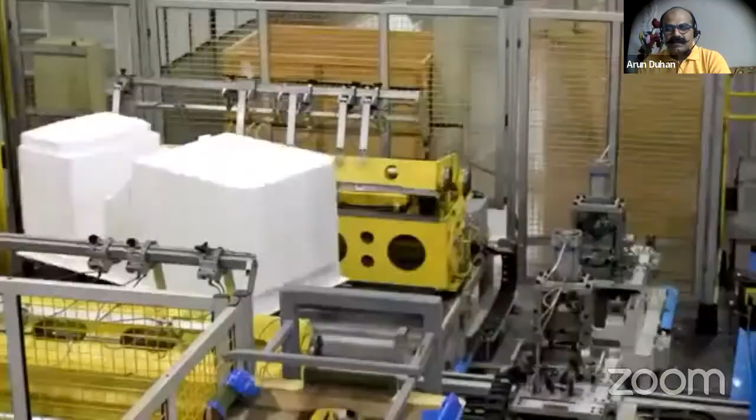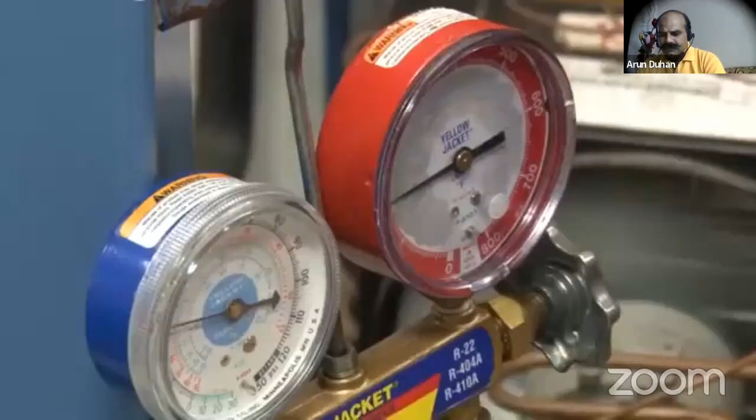ISHRAE disseminates knowledge through its technical committees, which consists of some of the best minds of our industry. It publishes technical books, newsletters, and a prestigious journal, distributing the wealth of knowledge to all its members. Working with government departments, ISHRAE helps formalize industry codes and standards. ISHRAE promotes research by offering financial support to student members to carry out groundbreaking work in technology, systems and processes.

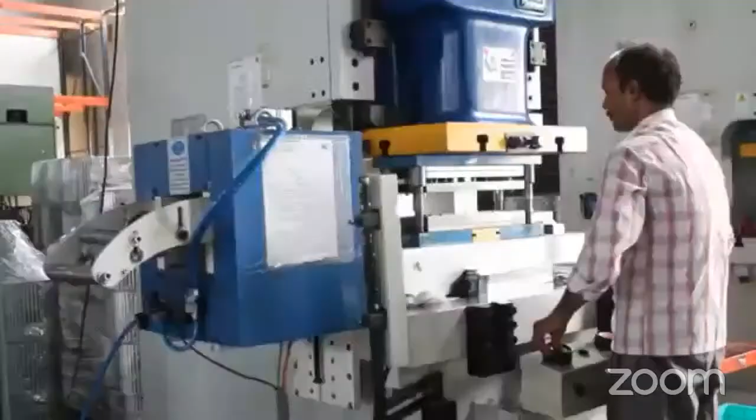Our educational wing, ISHRAE Institute of Excellence, organizes training programs and workshops to help members enhance their skill sets. Our specially designed certification programs under ICP, that is, ISHRAE Certified Professional, empower professionals to always be in step with the prevailing technology. Specially designed courses for technicians are offered to meet the ever-increasing demand for a skilled workforce.

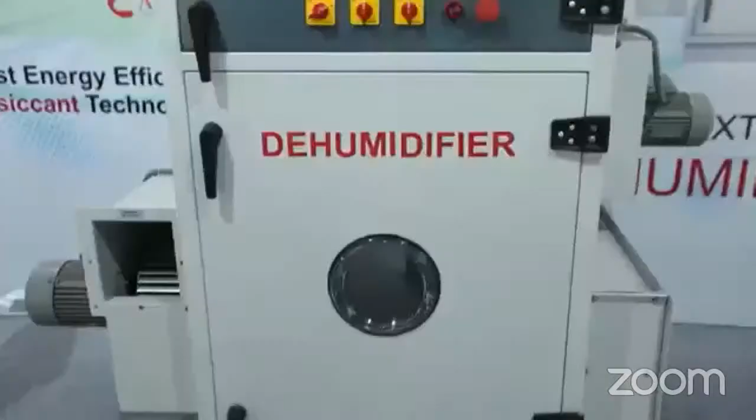ISHRAE organizes exhibitions, conferences, panel discussions, and product presentations throughout the country. We organize the industry's largest international exposition in South Asia, Acrex India, to showcase the cutting-edge technology, innovation, and provide a platform for closer interactions amongst the decision makers in the industry.

We are committed to provide training and career guidance to our student members through seminars, lectures, quiz contests and site visits. A-Quest, a prestigious quiz competition organized by ISHRAE to catalyze the transformation of the budding engineering professionals.

ISHRAE provides a platform to potential employers to select student members for careers in HVAC and our industry at the ISHRAE Job Junction. Young minds are made aware of the need for saving power, clean air, and sustainability. The K-12 initiative of ISHRAE focuses attention on school students' development to inculcate a scientific fervor and help develop them into responsible citizens.

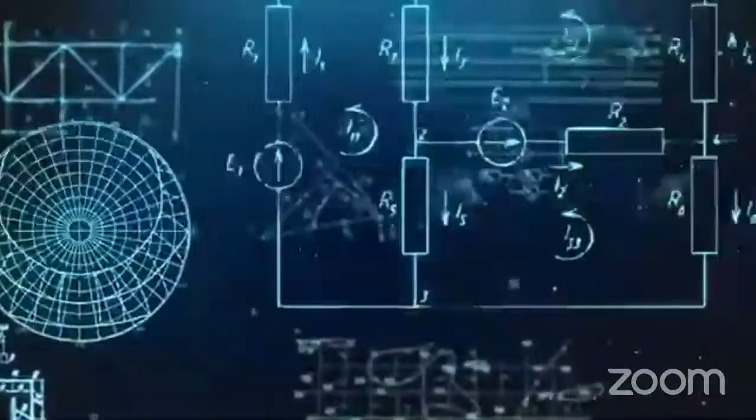Speedy information is imperative to keep moving forward in this hyper-connected digital age. Searcher, a specifically designed search engine, is now available, which allows access to a well-catalogued database on HVACR and building services industry with just a few clicks.

ISHRAE cooperates with various national and international bodies, industry, governments, academia, think tanks to promote the concept of sustainability, environmental protection, and energy efficiency and conservation.

To enter and explore the universe of the Indian HVACR industry, log on to ishrae.in that unfolds a panorama of information. Let us engineer a sustainable future together through ISHRAE.

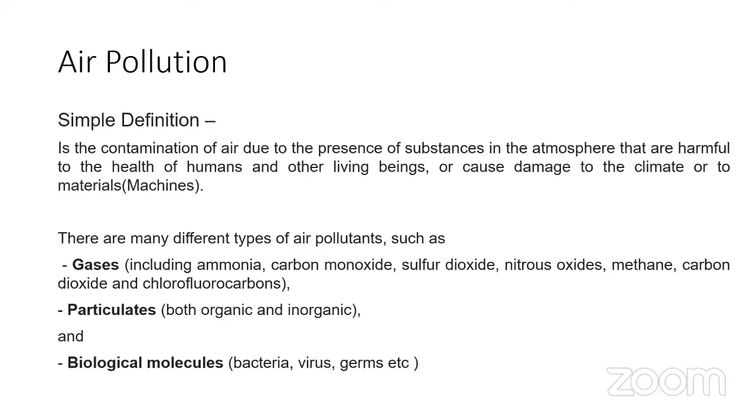So as air pollution goes, air filtration goes hand in hand now. Various air filtration techniques have been adopted to optimize air quality, and these techniques can remove air pollutants and effectively improve the deterioration of air quality that we all know. This presentation is a comprehensive review on the synergistic effect of different air purification technologies - meaning combining various air purification technologies together using air filtration theories and materials standards. We'll evaluate different air filtration technologies considering factors like their energy and economics, working principle, impact, performance and efficiencies. So that's all in a nutshell.

We will have a quick look in the following slides.

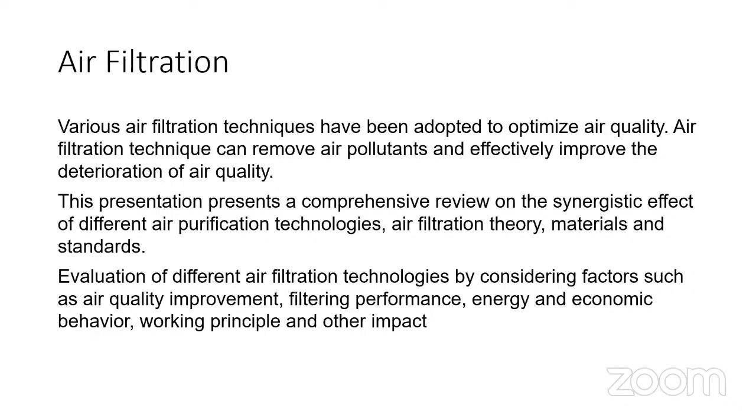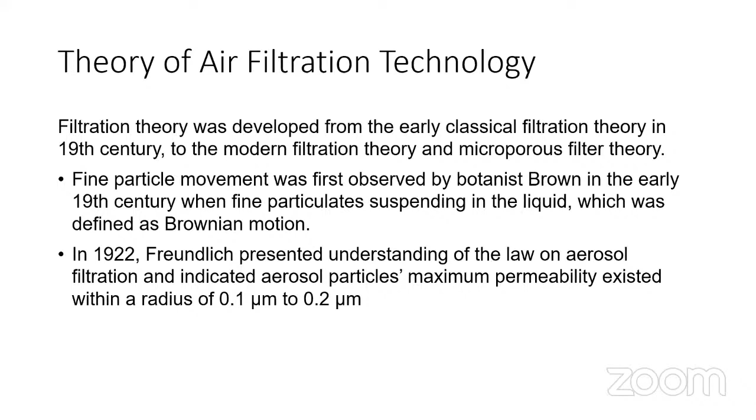Before we start getting into the filtration technologies, we must know where it all started and who developed these theories. Early classical filtration theory in the 19th century led to modern microporous filtration theory. Fine particulate movement was first observed by Brown in the early 19th century, when fine particulates suspended in liquid were observed, which was defined as Brownian motion. In 1922, Freundlich presented the law on aerosol filtration, indicating that aerosol particle maximum permeability exists within the radius of 0.1 to 0.2 micron. These were great findings by the researchers.

I have combined a list of researchers who have helped us in the past find the size, characteristics, and properties of various particles in the air, their various laws and filtration theories, and the practicals done to achieve separation of particles from the air. This is the chronological order of the key achievements by the great researchers in the past. This slide will be shared after the presentation to all attendees, so you can have it handy and read about the researchers more yourself.

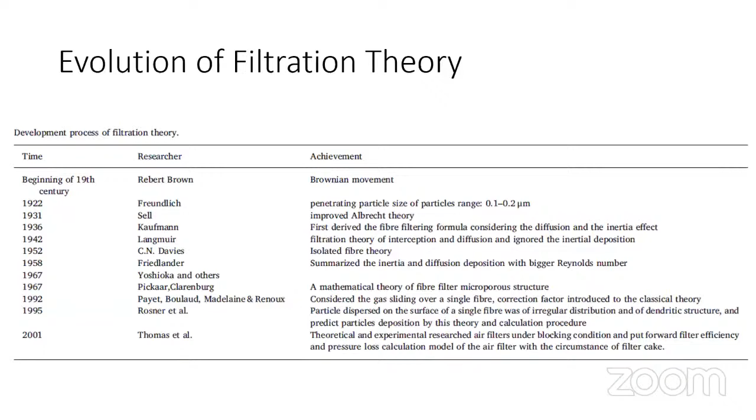So let's understand particulate matter. Most media, communication, news articles, and theories talk about particulate matter, and this is a key component when we talk about air filtration. We must know what particulate matter is. There are three matters: solid, liquid, gas. There is a fourth, plasma, but plasma doesn't pollute so far. These three elements are the usual suspended particulate matter we know as aerosol in the atmosphere. All these solid, liquid, or gas matters could have different shapes, sizes, characteristics, properties, and different reactions to resistance levels against force, electricity, or any other external action.

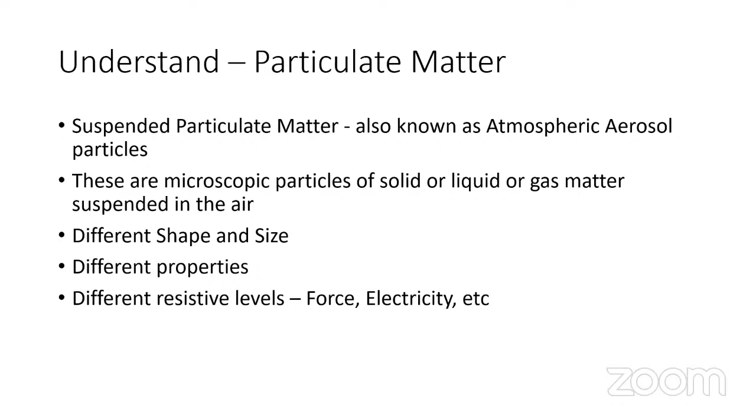The filtration systems designed in the past, or now being designed for the future, are evaluated based on various factors of the behavior of the particulate matter. So we must understand and measure the properties and characteristics of all three matters before putting up the filtration system, and that's what we will see and learn in the following slides.

If we take solid matter in hand, usually it's called dust, and everyone knows dust usually contains silica, sand, salts, minerals, mica, glass, wood. There are several things, fine particles or coarse particles, counted as dust combined. These are also characterized based on their properties into simple dust and difficult dust. Difficult dust is the kind that is not normal in nature, it could have very small particle size, very low density, or very low or high mass. It could be fibrous or non-fibrous, sticky or abrasive, reactive in terms of explosive particles, or hot or cold particles. So there are different characteristics and properties which define different behavior for dust particles.

These are key points which must be considered before selecting the filtration system, because either the filtration system will not be efficient enough to deal with the particle in the air, or it can create a byproduct or harm otherwise. So a detailed analysis of solid matters must be done before finding the right filtration solution.

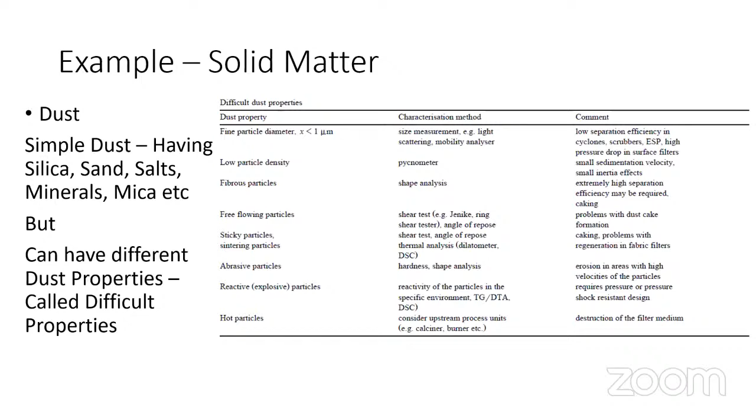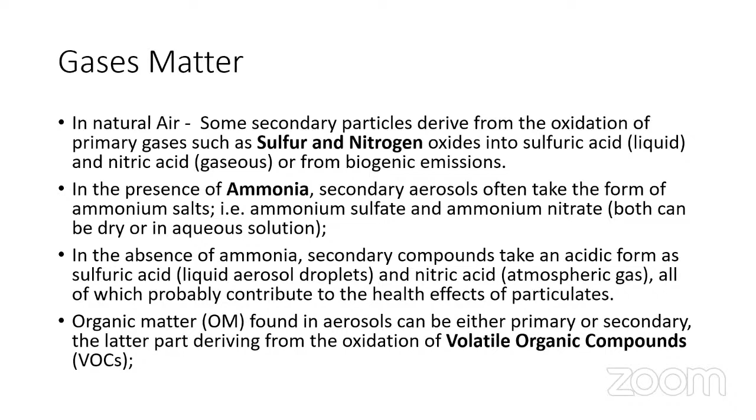When we talk about gaseous matter, in natural air, some secondary particles are derived from the oxidation of primary gases like sulfur and nitrogen oxide into sulfuric acid and nitric acid, and it could be in liquid and gaseous form both. In the presence of ammonia, the secondary aerosol often takes the form of ammonium salts, ammonium sulfate, and ammonium nitrate, and it can be dry or liquid. But in the absence of ammonia, the secondary compounds could be acidic, nitric, or sulfuric acids, again as liquid droplets as aerosol. This is important to understand, that gaseous matters can also produce liquid matters based on their reactions and oxidation properties. Organic matters like VOCs, volatile organic compounds, are also aerosols present as gaseous matter.

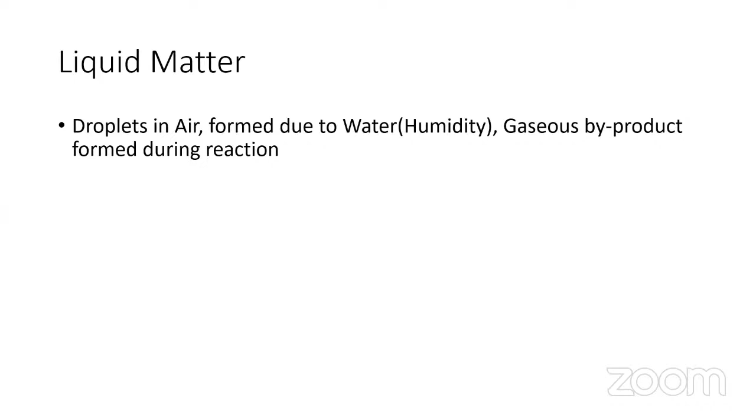So now let's have a quick review of the working principles identified by great researchers in the past, based on the various filtration techniques. Inertia, impaction, diffusion, interception, gravitation, absorption, agglomeration, electrostatic ionization and polarization, catalysis, radiation, combustion. These are the back-end working principles behind the various air filtration techniques that have been adopted in the past.

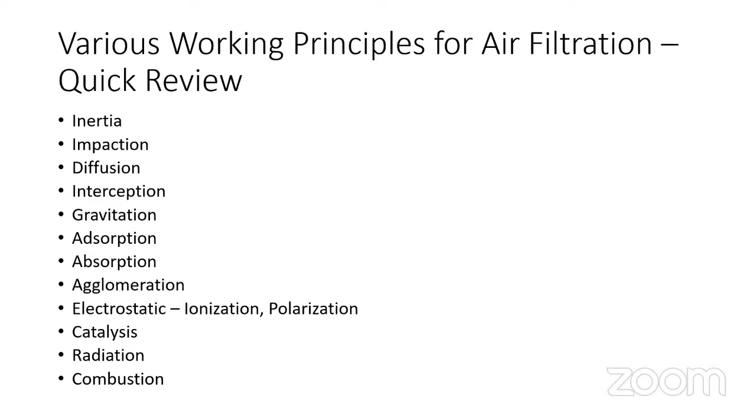I'm sure most engineers know what inertia and impaction are, so I'm not getting into the detail of that. But if somebody wants to know more about it, they can always drop an email or reach out to me. I can probably help explain, or we can have another session if required, based on your input about all these working principles.

Based on the working principles, this chart or table is drafted, which at a high level says what their effectiveness levels are on what kind of pollutants. The purification techniques are listed here, and we have bifurcated the pollutants into suspended particles as solids, gases, and microbiological, with their size difference. Mechanical filtration systems, usually fabric-based, work very well and are very effective for suspended particles like dust, pollen, lampblack, etc. But they are not effective on gaseous contaminants. For microbiological contaminants they could be effective or non-effective based on their size and diameters.

Adsorption-based systems, like grid blocks, granular media or activated carbon, are partially effective for suspended particles based on their pore size, but very effective for gaseous contamination arrestance. They are equally effective and non-effective based on the pore size, which can arrest the bacteria and the virus. Water washing as a purification system is effective for suspended particles, mainly solids, partially for gases, and not effective in removing bacteria and viruses. They will get dissolved into the water and nothing will happen to them.

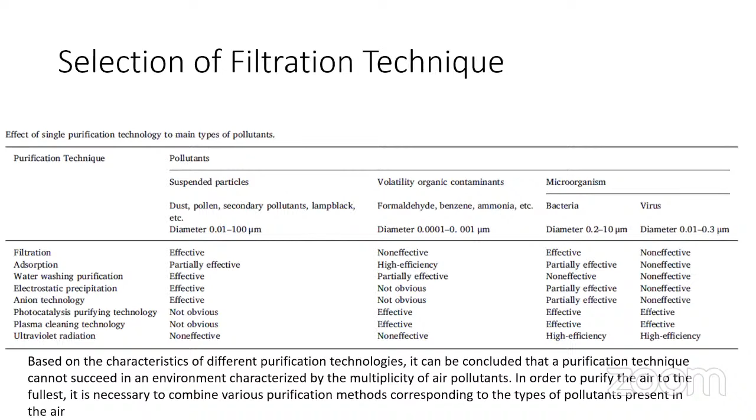If you see the pros and cons chart, again based on the technologies, they are relatively good on some aspects and not good on others. Take the fiber filtration system: as we've seen in the last slide, very good for particles and microorganisms. Their advantages are low cost and very easy installation and implementation. But their efficiency depends on the pressure drop, the resistance of air. They're usually highly resistive to air flow.

Electrostatic dust removal is very good for particles and microorganisms, but again, high investment is needed because these are costly machines, which also require regular electrostatic fields. If the electric field is not working, then there's a puncture in your filtration system. So that's a disadvantage. Also, frequent maintenance and cleaning is required because the efficiency curve declines with dust loading on the electrostatic plates.

We will talk in detail about how the electrostatics work and how the fabric fibers work in the following slides. Ultraviolet sterilization systems work very well for microorganisms, but as the flow rate and velocity of the air increase, the efficiency decreases. So it has to be rightly calculated, and if it is overdone, it can create byproducts as well.

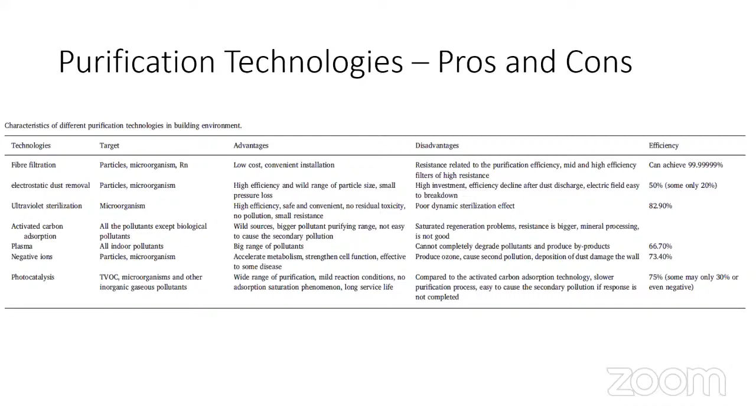Please. Okay. As I was explaining, photocatalytic treatments also bring pros and cons, and the cons are the reactions are slow, they don't work for particulate matter, and they create secondary pollution if the reactions are not completed. So these are the high-level advantages and disadvantages. The disadvantages could be listed by various factors, like economics, installation, size and dimensions, and energy efficiency. There could be n number of factors.

This is a slide I have tried to put together to explain how the synergetic effect works. We were talking about various pollutants and various techniques and their pros and cons, but as we said, one particular filtration technique cannot work for all kinds of pollutants. So how does the synergetic effect work? I have taken some examples of brands that use multiple technologies for air purification.

Take the example of Blueair here, which uses a fabric-based filtration system. They also have adsorption and electrostatic precipitation. All combined together, they are trying to cover the maximum band of air pollutants across the size segments. Sharp has created the Plasmacluster ion. Daikin has most of the technologies combined together. So this is a representation of integrating various technologies together to get the fullest outcome of maximum purification efficiency.

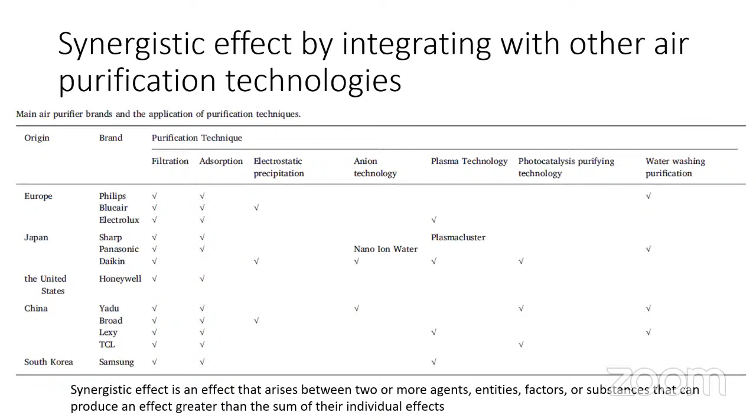So now let's study the filters. I have distributed them into three segments: mechanical, chemical, and biological, based on the working principles. I have also tried to list which works best for what kind of matter. The first section is mechanical. Settling chambers work very well for solid matter, then cyclones, electrostatic precipitators, spray towers, venturi scrubbers, bag houses, fabric filters, which work very well for solids, and deep bed scrubbers.

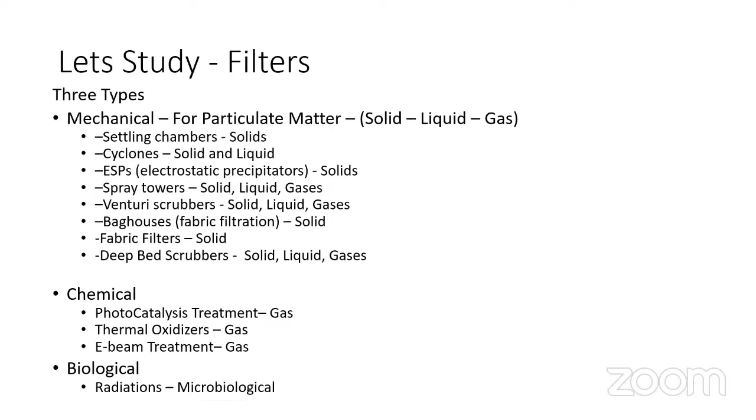These are the popularly known techniques or filtration systems, widely used in various sectors like industrial, commercial, and domestic for a long time, and very proven from an efficiency perspective. But as I said, something works for some kinds of pollutants, and another thing works for other kinds. So we will get into all the details one by one. Let's see how the settling chamber works.

The settling chamber is the simplest designed system, wherein there is a chamber called the settling chamber, and an air stream goes in and out. From the design, the airflow coming in at the inlet slows down in this chamber, and because of that, with gravitational force as the working principle, the bigger particulate matter drops into the hoppers. Once the hoppers are filled, we take out the dust particles, and the air going in and out gets cleaned.

So it's the simplest way of cleaning air that has bigger particles. It doesn't work for fine particles. It is widely used in industrial emission controls, for dust, fibers, metal chips, etc. These are reusable systems, which is a great advantage, because once deployed you can use it for n number of years with regular cleaning and maintenance. The biggest disadvantage is that these are usually very big in size, and that's the reason they are widely used in industrial emission controls.

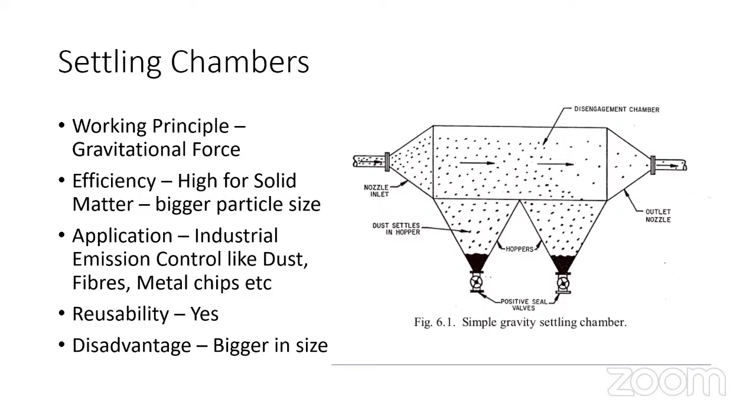The second type of most popular system, specifically in the industrial sector, is the cyclones. Again, it's a very simple designed system, wherein there's one inlet for the airstream and there's an outlet of the airstream, but it's at a very high velocity, so that once it reaches this vessel, which is cylindrical and conical in shape, a cyclone is produced. And with the working principle of inertia, gravitational forces, and agglomeration all together, the particles drop into the hopper, and the air stream which is revolved in this vessel gets clean.

It is again very good and highly efficient for bigger particles. It even works for smaller particles because of the agglomeration. Widely used for industrial applications, again for dust, fibers, metal fibers, woods, etc. This is again a reusable system, because once deployed, just cleaning is required and it works well for many years. The disadvantage of the system is that it is difficult to remove wet or sticky particles. It has to be dry. So usually before the cyclones, air dryers are also installed to get the maximum efficiency out of it.

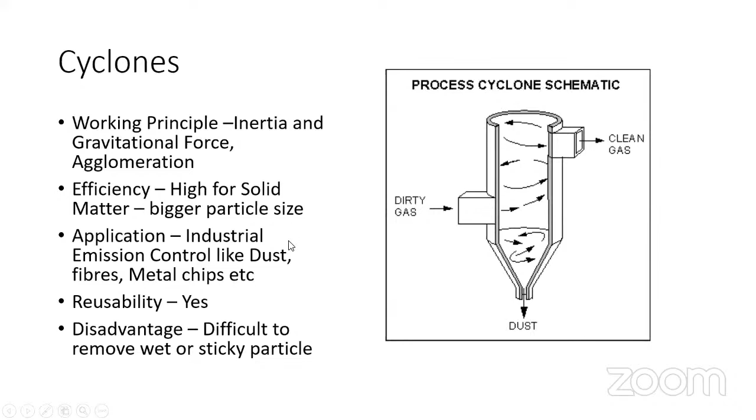If we take a small example, if we add, let's say, ionization to the air field, the agglomeration can be increased, and we can get better efficiencies even on fine particulate matter. And sometimes after-filters are also installed to capture the fine particles that don't get dropped here. So that's a high level understanding of the cyclones.

The third one is the electrostatic precipitators, widely used for many years for industrial applications. It was actually designed for industrial applications for smoke and oil mist collection. The good part of electrostatic precipitators is they are very efficient even for smaller particles down to 1 micron, and the working principle is ionization between the plates. There are charging plates and collection plates. When the air passes through the charging and collection plates, the particulate matter in the air gets charged and gets collected on the collection plates.

This requires a high potential corona to be generated. The corona discharge is the voltage at which the air becomes a conductor, usually also called the breakdown voltage. Above 8,000 volts is operated here, and the disadvantages of the system are that when humidity levels are high, the efficiency goes down, and this system also generates gaseous byproducts.

In the airstream, as we all understood, there's solid, liquid, and gaseous matter. So in the natural air or the flue air, there are multiple natural gases and multiple VOCs, which also pass through this corona discharge or plasma field, and their electrons get excited, which starts reactions with other gases or with the water droplets in the air, and creates byproducts which are usually not even present in natural air. So that's a big disadvantage of this system, but otherwise it works very well for smoke and oil mist or particulate matter arrestance.

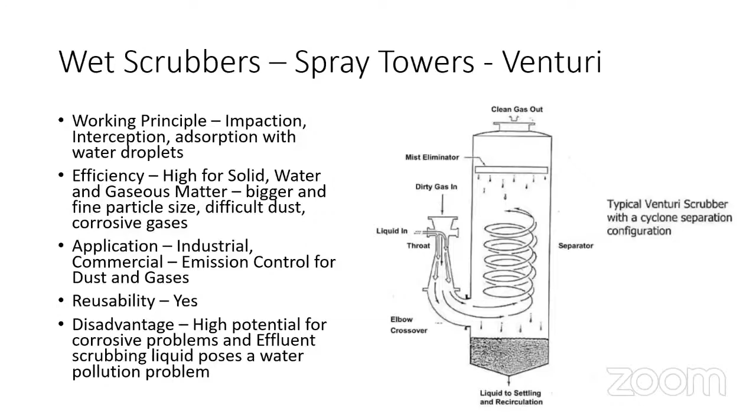Let's come to the most popular fabric based filters, the mechanical filters. I'm sure everyone knows about it. So mechanical or fabric based filters are widely used in almost all applications, could be domestic, industrial, commercial, for indoor air quality or emission control.

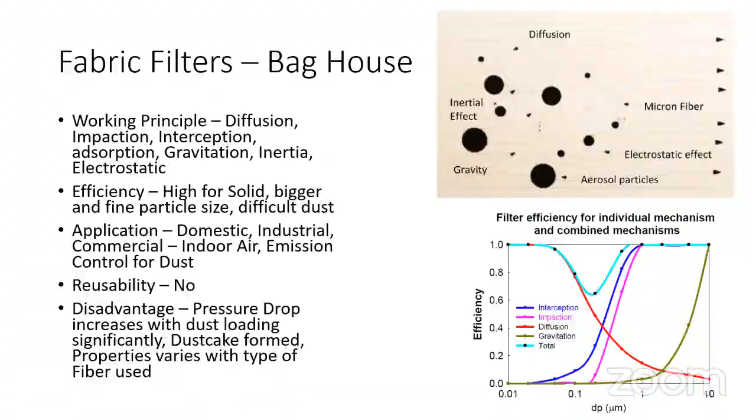So as I said, fabric filters are widely used in most applications. But before selecting the right fabric or fiber for the filtration, we must know for what application we are using it. Is it high velocity? Is it high temperature? Is flexibility required? What are the levels of acids or chlorides in the air? Because they are going to react with the fiber and fabric, and that will impact the efficiency of the filtration system. So it is very important to understand.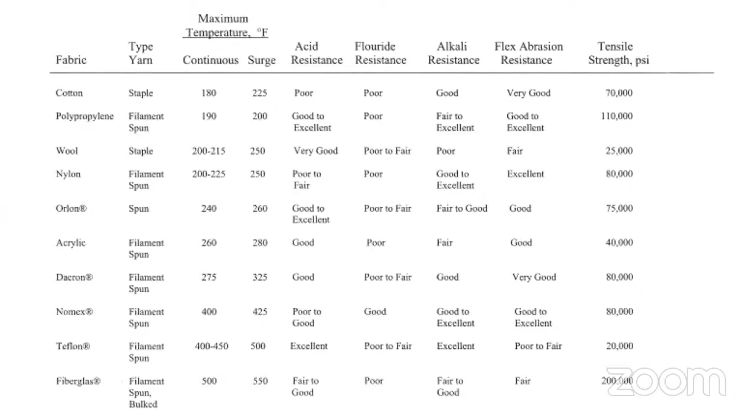Next comes the deep bed scrubber. Again, a very good filtration technique. It works very well for gaseous matter, not so well for particulate matter or liquid. The working principle is absorption and catalysis. So it basically depends on the media being used in the deep bed.

The biggest disadvantage is the reusability. Most of the media which absorb the gaseous contamination is not reused, and if we have to regenerate the media, there's an additional cost for the regeneration, and sometimes it is not easy. So it all depends on what kind of gaseous arrestment is being done on the media.

The structure, again, is very simple. There's air in and air out, wherein there's a deep bed of granular media, which could be a blend of activated carbon and zeolite with different levels of impregnation. So the selection of the deep bed or the impregnation depends on what kind of gases we need to arrest or remove. But deep beds provide above 99% purification if they're rightly calculated.

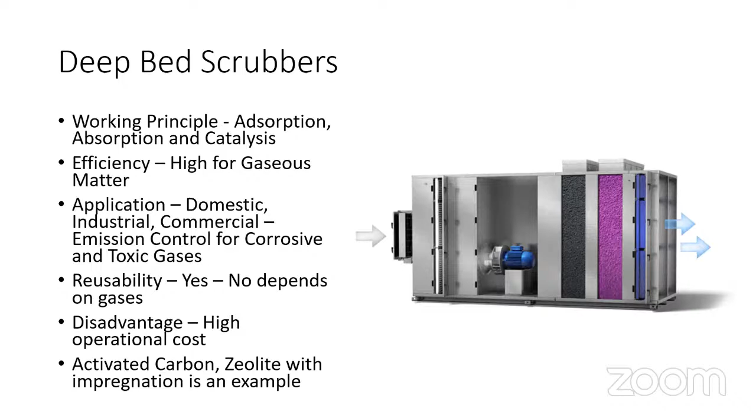Another technology, photocatalytic technology, is also a very good technology, and it works very well for gaseous matter, specifically removing or eliminating VOCs or microbiological contamination. The working principle is the catalyst; photocatalysis is the acceleration of the photoreaction in the presence of the catalyst. So basically, light as an energy source is used with the catalyst to have a chemical reaction in the air.

It actually produces hydroxyl radicals by reaction with the water droplets in the air, and these hydroxyl radicals react with the sulfur dioxide, ammonia or nitrogen dioxide present in the air, and usually decompose them to substances like H2O, HNO3 or H2SO4.

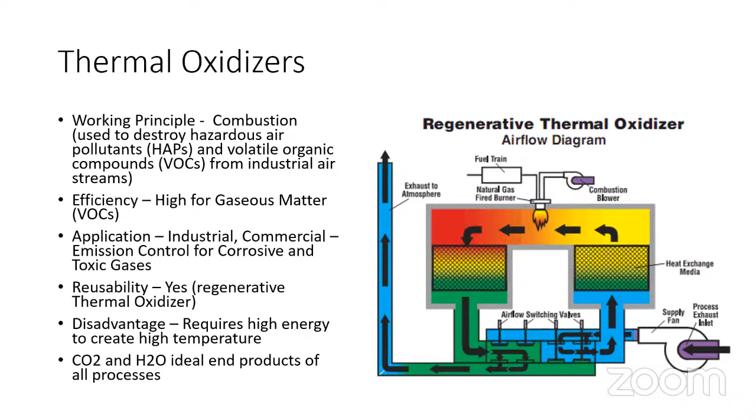Electron beam is also used from application to application, wherein electron beam ionization, bipolar ions, are used in place of the oxidization chamber, like the thermal one. So usually the construction remains the same, but in this the corrosive gases or VOCs are removed by using the ions in the chamber, and these free radical ions react with the molecules of the gases, and different byproducts are generated as inert substances, which get removed from the contaminated air.

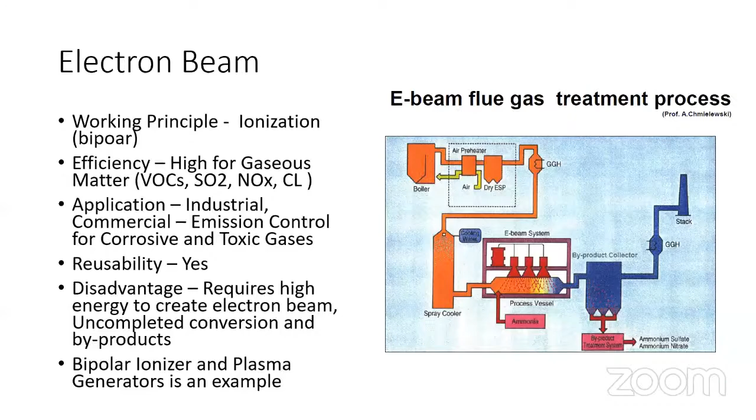So if you take an example, bipolar ionizers and plasma generators are the examples which are now being used even in domestic applications. But it requires high energy levels to create an electron beam, and sometimes incomplete conversion creates byproducts. So usually this system creates a byproduct, and that's the reason it is not widely used, but only for some specific applications.

So that comes towards the end. To summarize what we have understood from the presentation: air pollutants, as a matter of fact, could be solid, liquid, or gas, and all pollutants have different properties and characteristics. There is no one filtration technology or method that can remove all pollutants, and that's the reason it has to be critically evaluated before the selection of the filtration technique, method, or any product. There are pros and cons for each kind of filtration system that cannot be completely eliminated, because one thing works well for one pollutant but may not for another, and may also create byproducts.

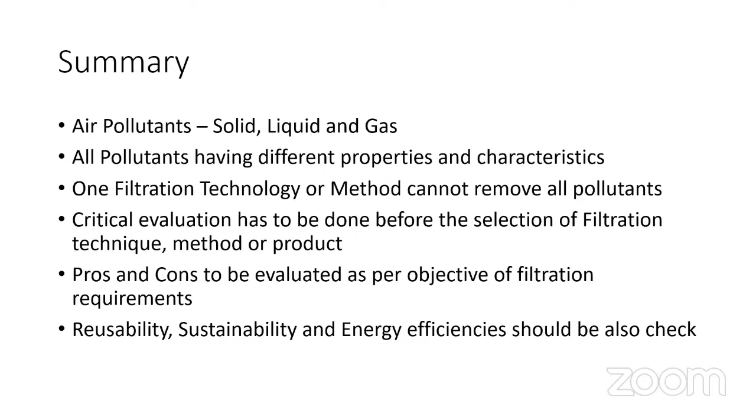So it has to be critically evaluated, and we must also see the reusability, sustainability, and energy efficiency before selecting the right filtration system. So I hope the data and the points for the selection methods we have just run through can help in finding the right filtration systems for any of your projects or programs.